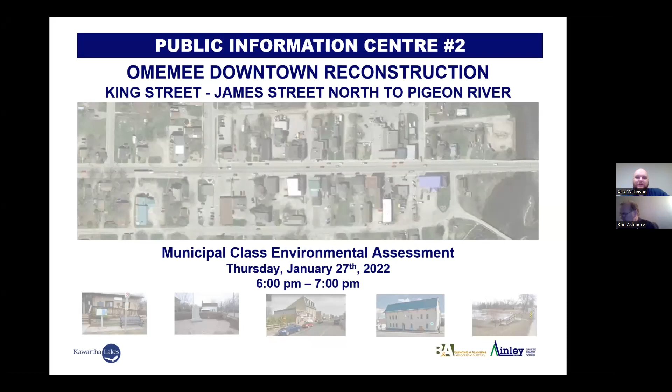With everybody introduced, I'll begin the presentation now. As Corby said, we're conducting the second PIC for the project tonight. The first portion will consist of a presentation that details the planned works, followed by a brief question and answer period for the attendees.

Before jumping into the details, it's important to note that this project is being completed under a municipal class environmental assessment process. The EA process is a planning tool used to identify the possible adverse effects of proposed infrastructure on the environment based on the nature of the project. The works being proposed as part of the Omemee Downtown Reconstruction Project are classified as a Schedule A+ project, which are usually associated with minimal environmental impacts and are pre-approved.

On this slide, I'm showing the general extent of the project area along King Street. On the west limit, we have James Street North. On the east limit, it's the bridge deck at Pigeon River. Throughout the project area, there's intersections at Sturgeon Road North and South, George Street North and South, Colborne Street, and Mary Street West.

In 2012, the City of Kawartha Lakes completed the Growth Management Strategy and Municipal Master Plan project. The purpose of this study was to develop a strategy to plan for and manage growth in a sustainable manner that addresses economic, social, and environmental considerations. One of the volumes in the study was the Transportation Master Plan, which included recommendations for improvements at the intersection of King Street and Sturgeon Road North and South. These improvements primarily consisted of a widening of King Street to allow for an additional dedicated left-hand turn lane for eastbound traffic.

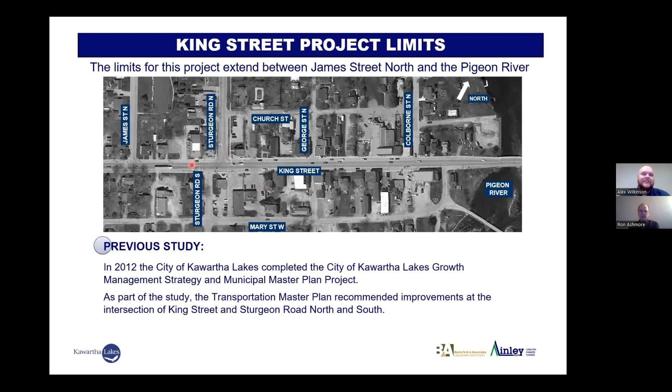The proposed scope of work can be broken down into two components generally. Road reconstruction: the benefits overall are improved underground infrastructure, mostly dealing with storm sewer, vehicular traffic flow, and improvement of queuing at the intersection of King Street and Sturgeon Road. The road reconstruction itself is about 500 meters in length, and it's going to consist of new concrete curb and gutter.

The predominant servicing throughout this corridor is storm sewer. The sanitary and water main, from our understanding, are mostly connected at the rear of the properties. So when we go to do the road reconstruction, we're going to be removing the existing storm sewer and installing new storm sewer that is up to city standards and provides improved capacity.

In general, there's two storm sewer systems throughout this project area. George Street ends up being the drainage divide generally between the two, with the portion on the east side of George Street ultimately draining down and discharging into the Pigeon River. There's going to be some consideration of an alternative outlet location, and I'll get into that a couple slides later.

Something I've already mentioned was the dedicated left turn lane for eastbound traffic on King Street, turning left onto Sturgeon Road North. As an ancillary work, this will involve some utility relocation, mostly hydro at this point. There's two hydro poles located, one on either side of Sturgeon Road South, so to facilitate that widening at the intersection, it's going to require relocation of both those poles.

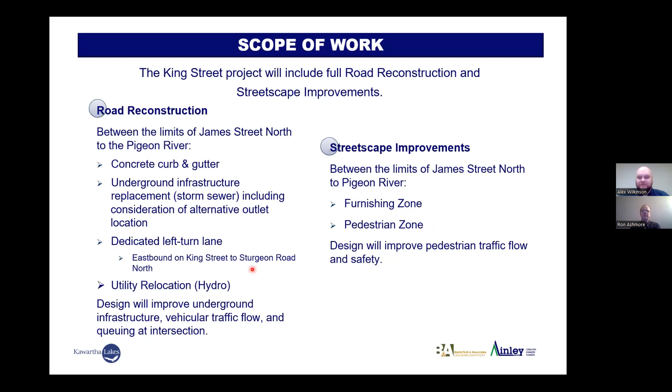The curb bump outs were actually a focus of the first PIC, and the public was encouraged to comment on them specifically.

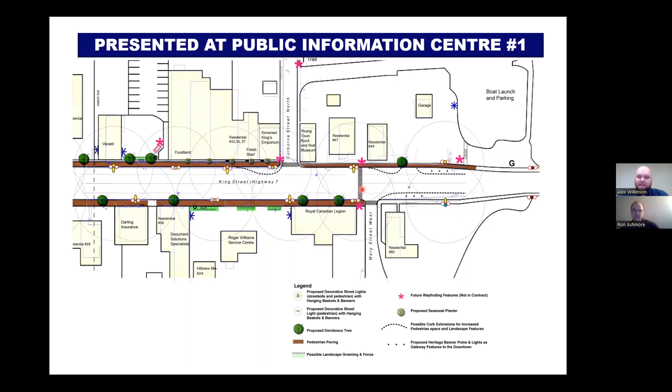So having presented that at PIC number 1, here's the feedback that we received. Overall, what we heard was that there was support for the streetscape and facade guidelines and its features, especially for the plantings of greeneries and trees, and the public was interested in trying to maximize this aspect to the extent possible.

However, the support for the curb extensions was very limited. There was also some interest in looking into the pedestrian crosswalks, which would involve traffic signalization and calming measures to achieve that.

As always, one of the main concerns was the timing of the construction and how access to the businesses would be maintained. So in the following slides, I'll give you an idea of what we're now proposing and how all this public consultation has been incorporated into the revised streetscape plan for the project.

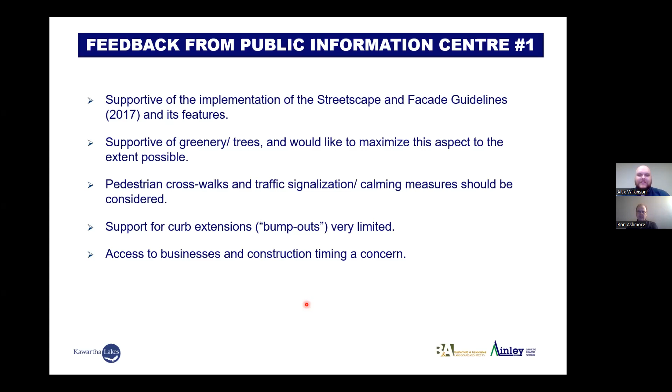Some of the features that were previously envisioned behind the sidewalk, we've since confirmed the municipal right-of-way limits, and we've determined that they're beyond the municipal lands and actually on private property, so they've been omitted or moved into the right-of-way.

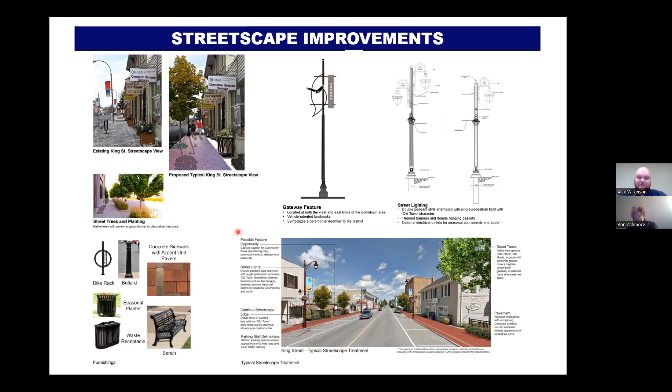That's what I'd like to mention next, the roadside parking spaces. As you can see, and as you might have noticed in the last couple slides, the existing number of parking spaces isn't expected to be reduced by anything such as the curb extensions. The only places we're seeing the curb extensions are in a taper zone, which don't currently provide parking.

As we work our way through the detailed phase, which we're in now, we'll be incorporating some of the comments we get from this PIC tonight, and we hope to conclude that in February 2022.

Once the design is completed, we'll be looking at the construction timeline, which currently is dependent on funding approval from the MTO through their Connecting Links program. The funding decision is anticipated March 2022, and if received, this project will be tendered shortly thereafter for a start sometime this spring, concluding this fall.

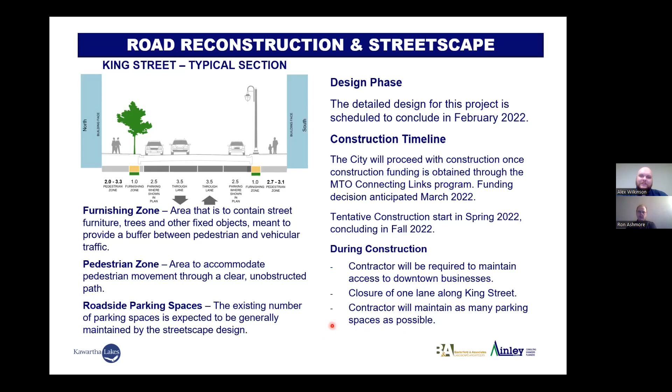This concludes the presentation portion of the Public Information Centre. As a recap, from here we're going to be receiving and reviewing any comments from the attendees tonight or received online, incorporating those into the final design and working on some final touches, including the storm sewer and the placement of street furniture. Pending construction funding approval, we'll be tendering the project for construction.

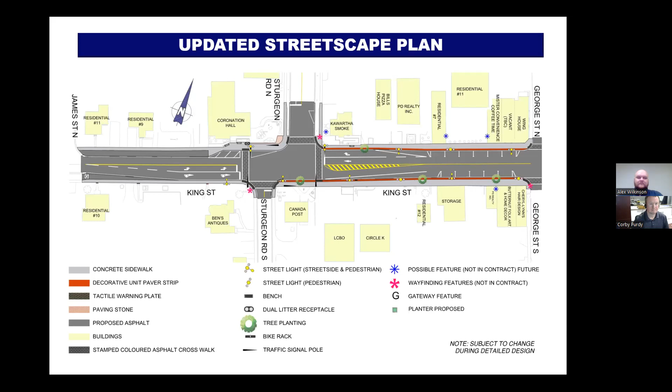Hi, yeah, I have a question about brick versus concrete on the sidewalks. Reducing it really does have an impact on the design and look and feel of that Main Street corridor. I'm wondering, is that just a dollars and cents thing? Because the brick, as I've seen it in other markets, is pretty effective. Is there a reason why we've reduced it?

Well, from my understanding of the previous streetscape and facade guidelines, I believe it was always envisioned as a strip. Another thing to remember, being in a furnishing zone, there's going to be street furniture, plantings, lighting there. So snow removal is already kind of tricky, and through the pedestrian area, I know sometimes there are concerns with plows and how they handle unit pavers. So there's definitely maintenance benefits in that sense. If you would like to see a full width of unit pavers, I would encourage you to submit a comment so it can be recorded in the project file.